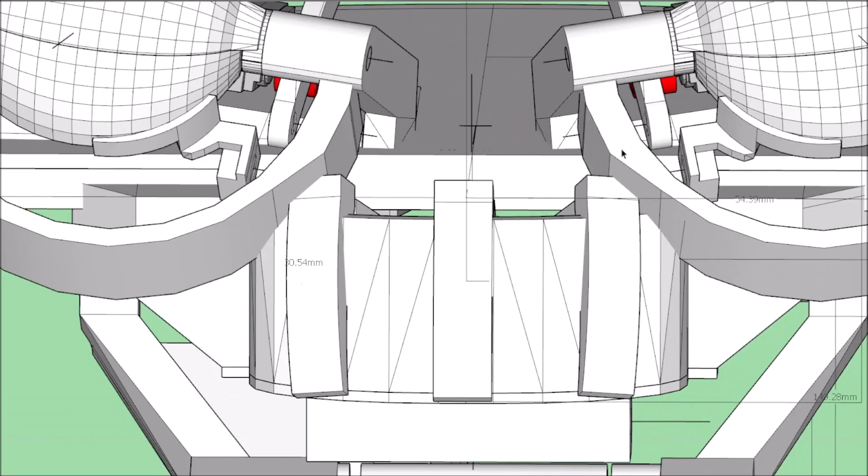But anyway, to the design, this is what I've been studying, mainly to get this connected to this ring underneath the eyes, so I can have this in one piece. And it's not necessarily the outside of this ring, it's the inside where the linkage connects to the servo. I got to make sure it has clearance.

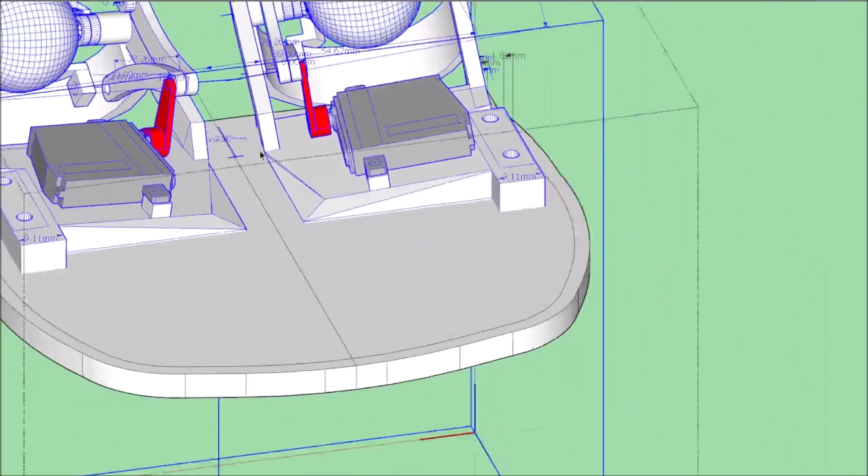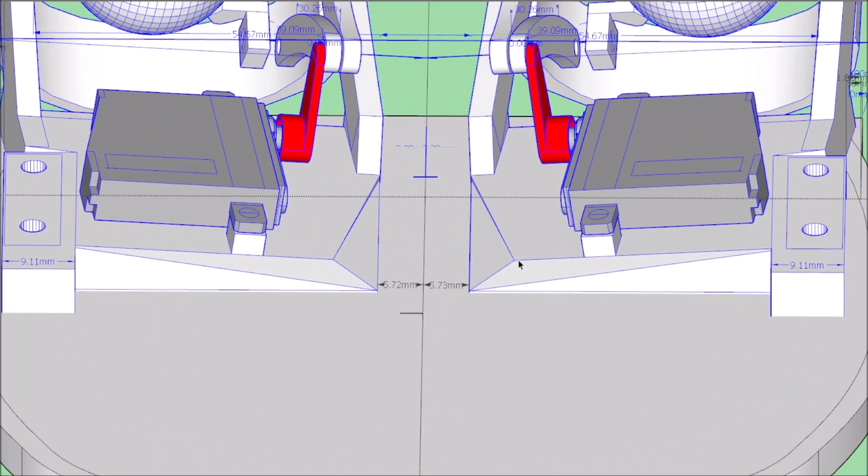But also I'm going to try to join these two together. You'll see me trying to study, because if I can cut this horizontal so I can print it like a flat plate, I like to do that because it helps with the supports. And I try to avoid supports if I can, even if I have to have multiple pieces. That's just the way I like it, because everybody knows that in 3D prints, supports can suck.

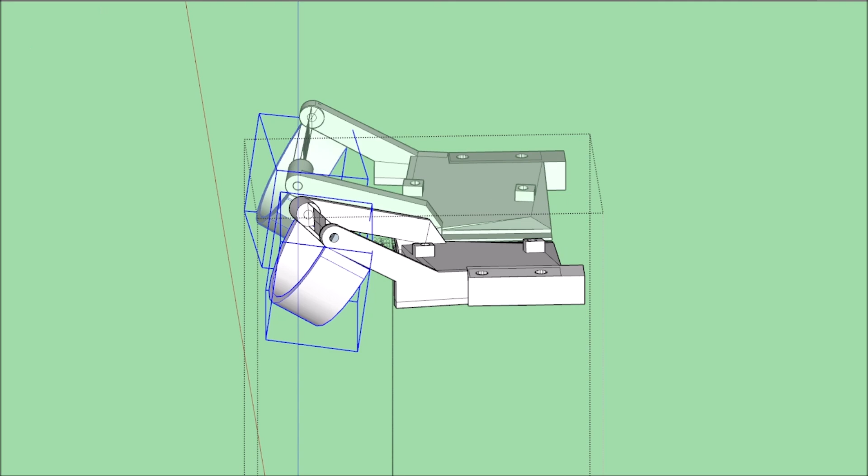Now this is recorded sped up times 4, but you're seeing what I'm trying to edit here, and this is just part of it. You'll find out sometimes the mirror seems to be off, so I'm having to make adjustments. Once again, it's at speed 4, and I'll remove a lot of stuff like the hourglass. My computer is about 12 years old. It's an i5, but it's still powerful and still does the job.

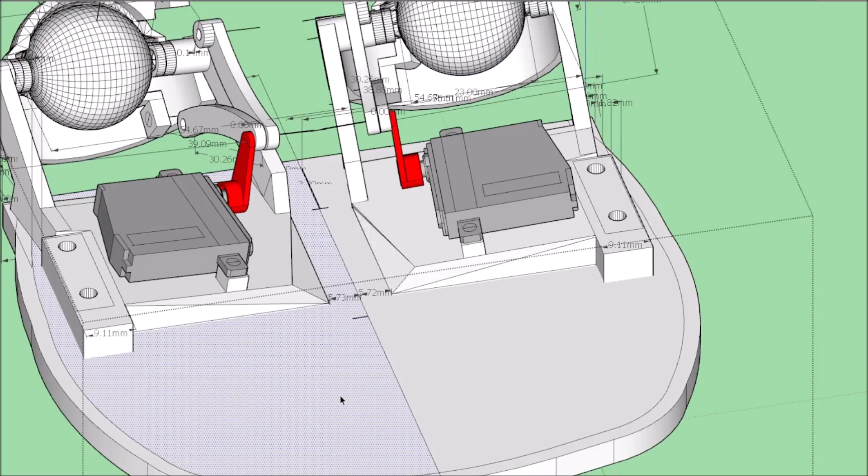So, like I said earlier, the measurement's a little off, and I'm talking like a quarter of a millimeter. You don't think that's much, but it can later on affect things. So what I'll usually do is just mirror again, and it's just me editing.

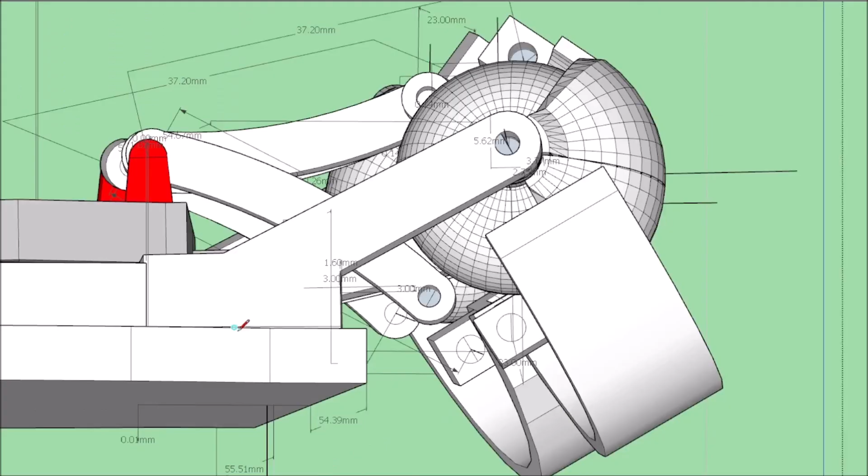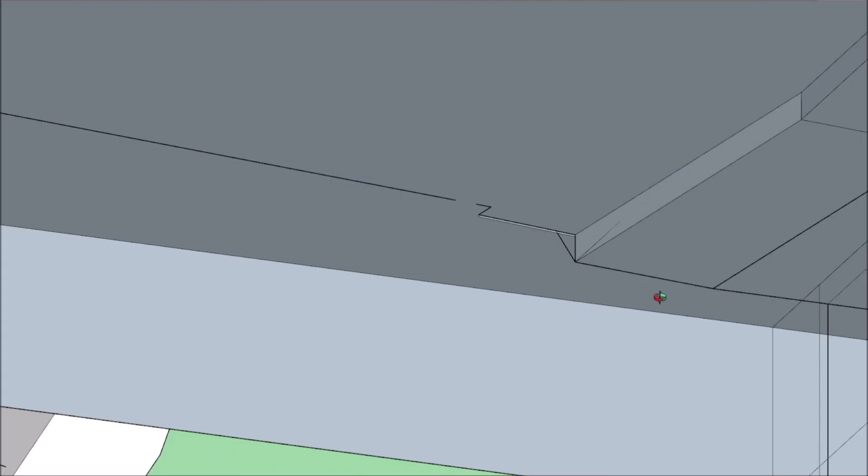What I did is I linked up the interfacing faces and joined these blink mechs to this main support table here. And I'm going in here and editing the inside where all this needs to be removed. For anything you're going to 3D print, you don't want any extra vertices or anything like that.

So I just go in here and edit all this and make sure it's clean, and I check everything in Netfabb to make sure I don't have any problems with the print, because it sucks, but you have to do it. It's just part of it.

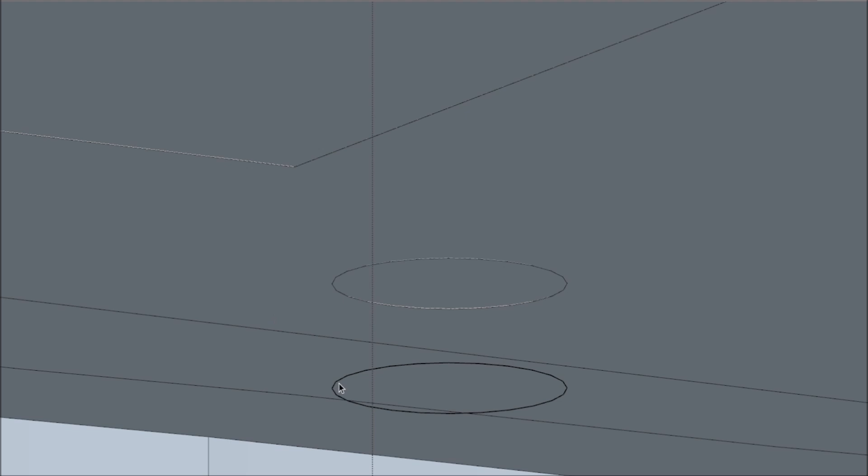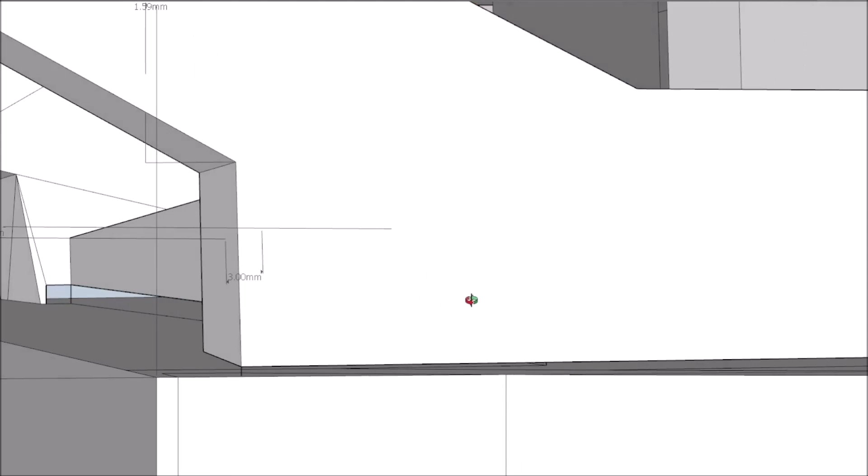But these screw holes here, once everything is set right, I'll just push them through again, extrude them, and make new holes through the whole new plate. It's just a little editing and getting everything set up to get this one side of the mirror complete, so that way I can just mirror it and it'll be all correct again. Here I'm just trying to make sure I get one side correct before I mirror it.

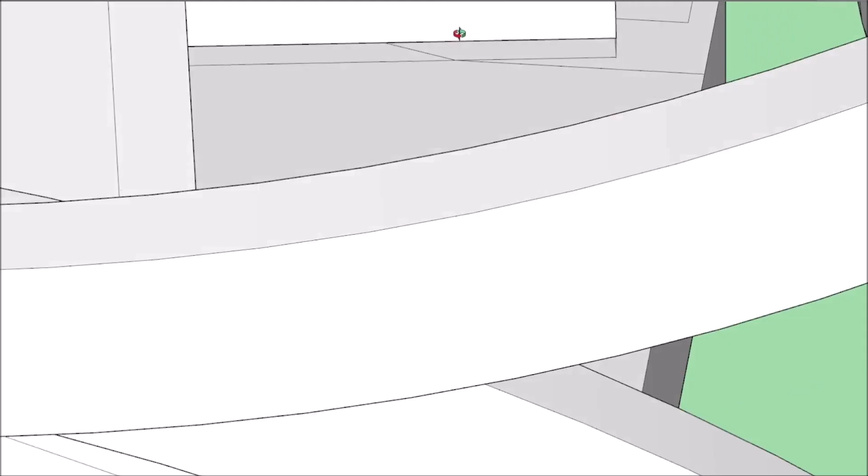I use Netfabb to check, and sometimes it'll find errors, and I can't find the error they say is wrong. There's auto repair and stuff like that, but still, I like to try to fix it myself.

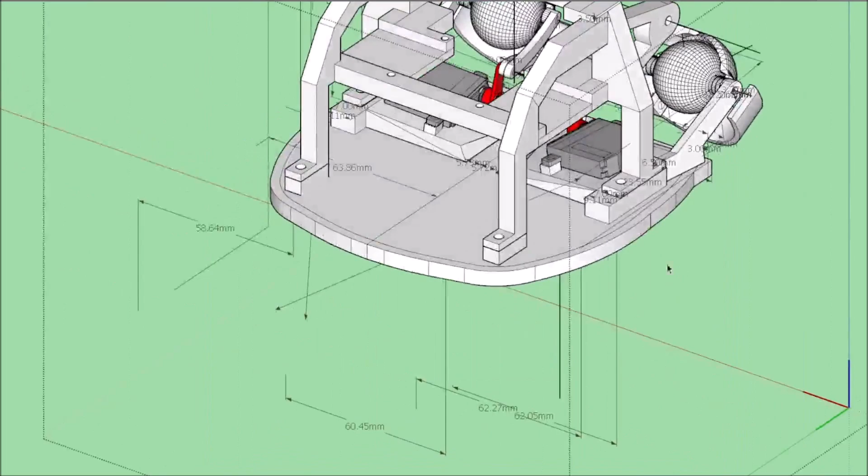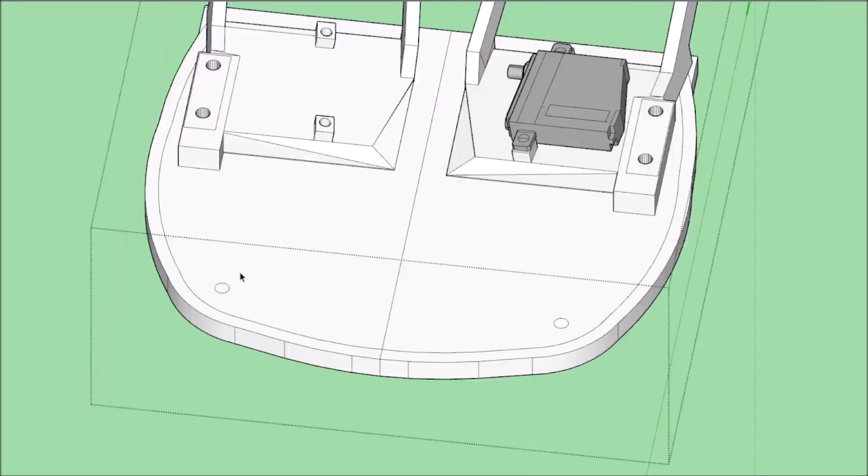But as you see here, I got to make adjustments to this scaffold area so it has a little support that raises up about 5 millimeters. But I also have to make sure that the scaffold is level when it prints. I'm going to print the whole scaffold in one piece.

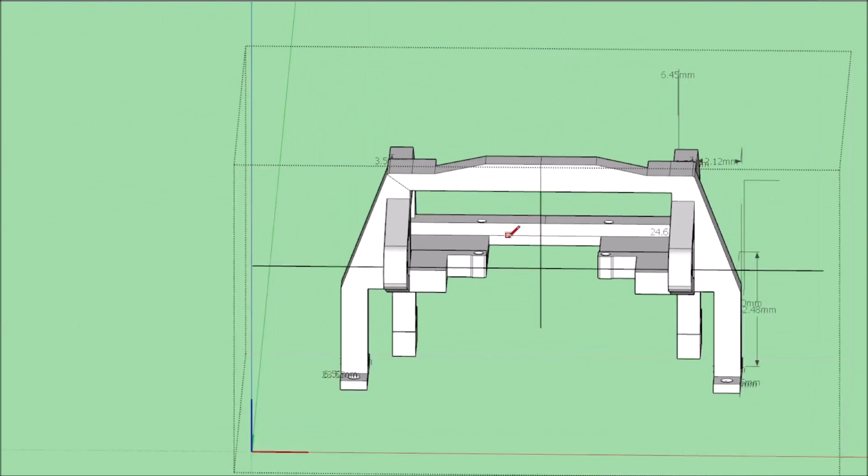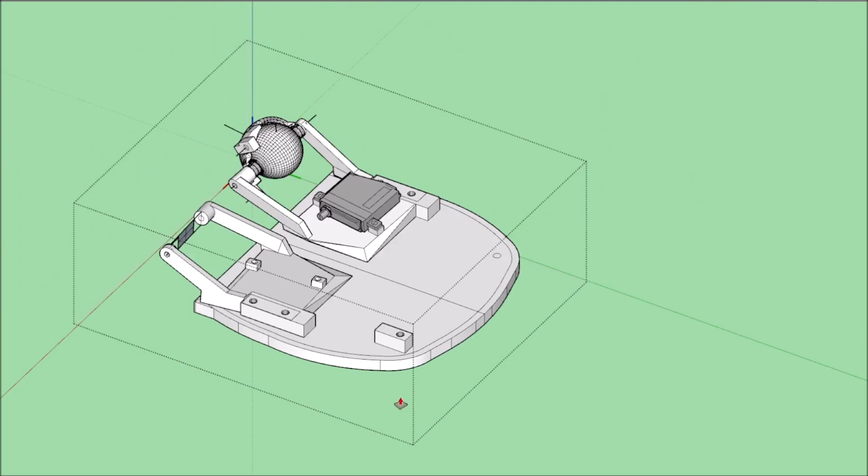Usually I find myself working on the right side, and sometimes I'll switch it up, but you got to be careful, and that's when you'll mess up a mirror. I'm talking about a quarter of a millimeter off, and it'll add up.

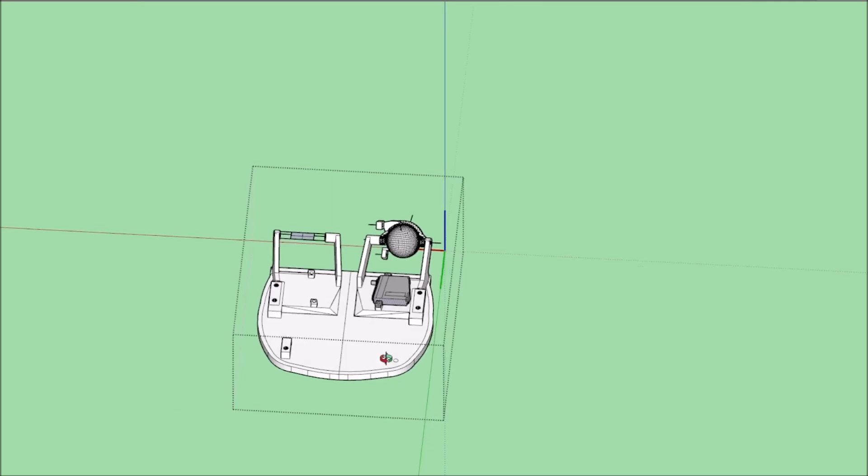You will see here, right here on the component on the left eye, that when I remove the component, it locks it onto the frame of the eyelid neck. So I know I'm going to have to just remove this whole section anyway. So basically I just highlight this whole side and just delete it and just clean up any vertices, lines.

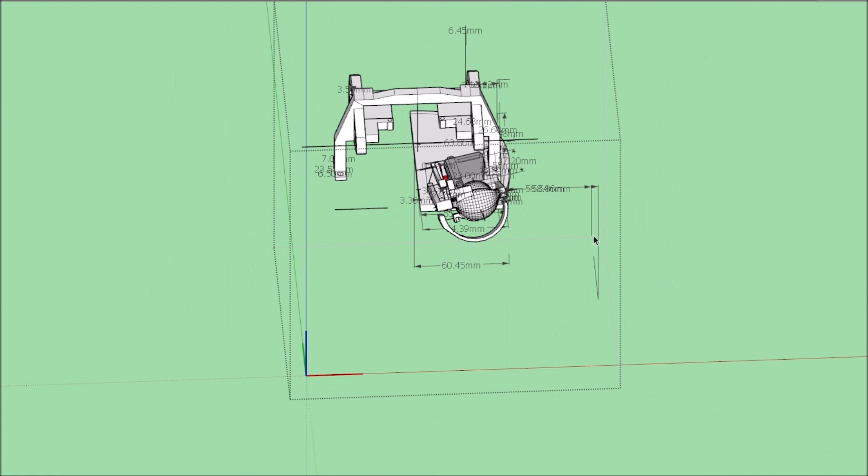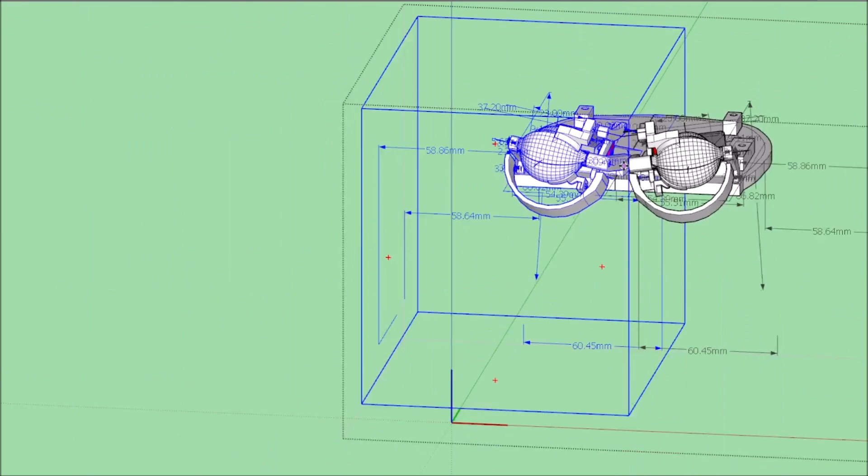Another thing about mirror is that you can go back to it if you want to make another animatronic. You can use this again as, like, from a library. But you can only go so close to where the linkage is hit. But then you have to either change two servos to one servo, that way you can control them with one. But that will kill the mirror design.

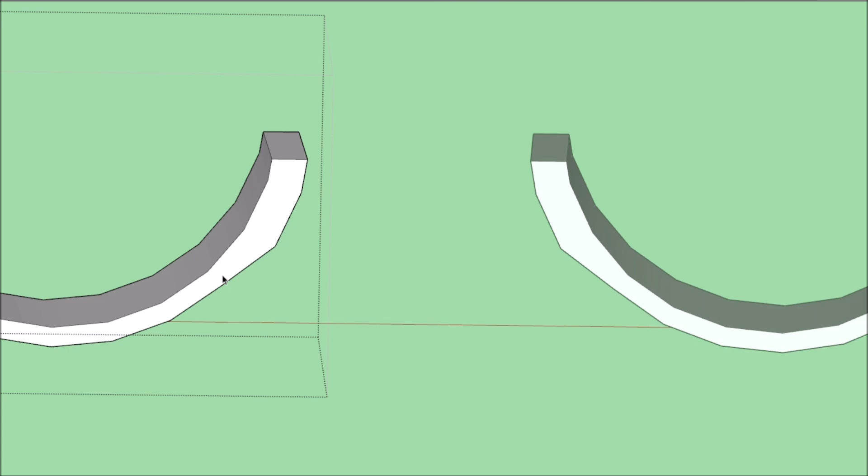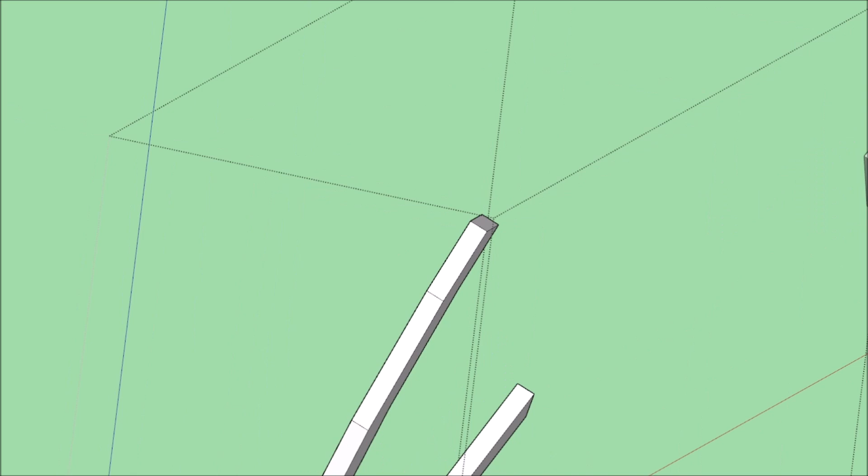But it's fun though. You'll see here where I'm trying to work out this so-called ring under the eye. And I just have to make adjustments to this ring so I can have clearance on the mouth or the lip hinge. I got to make sure I have clearance there, but I also want to join that ring to the bridge of the nose and things like that. All that needs to be filled in because I'm going to have skin attached to it too.

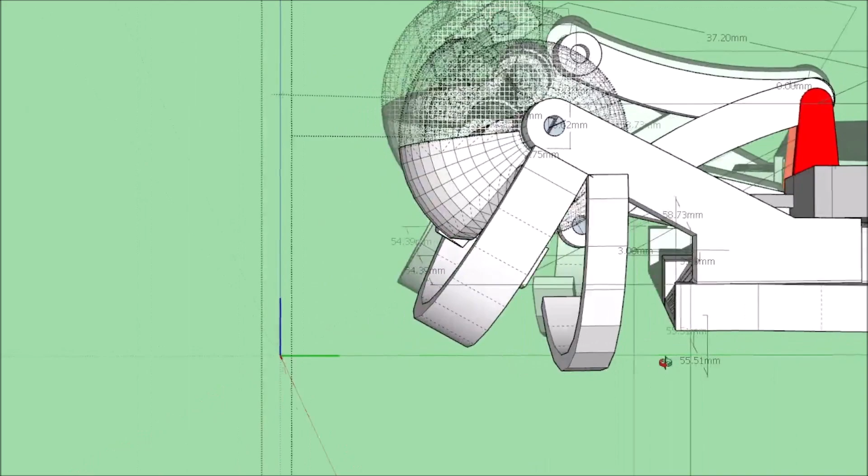I don't want an empty space there because that skin will be baggy, and it could produce a weird kind of movement when I'm moving the lips. But I would prefer to have something to stick the very upper top of the lip there so it would just curl up the upper lip itself.

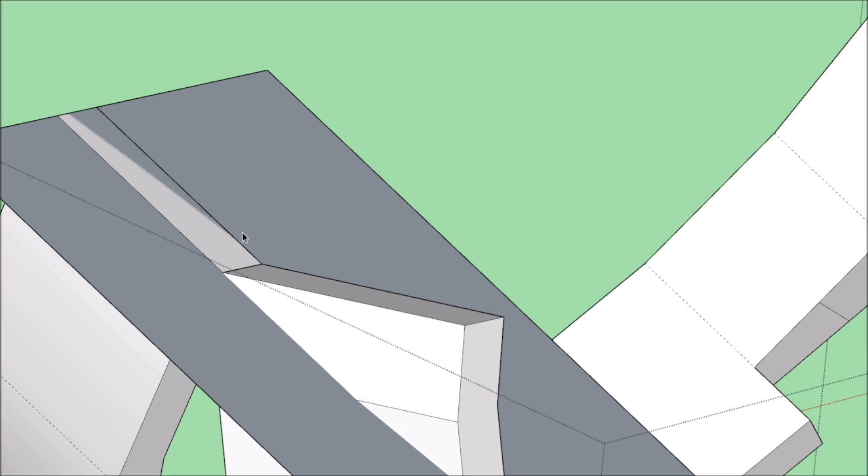But a lot of this design stuff here, I want to be able to make sure that that second part of that ring is the same flatness as that first ring. So I have to make little plates to do that interface with mesh so it'll be flat. But that flat part's going to be connected to that support of the lids.

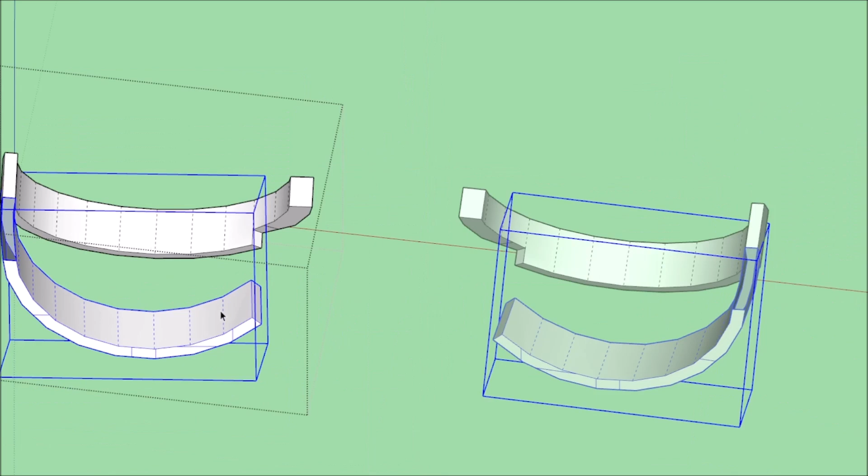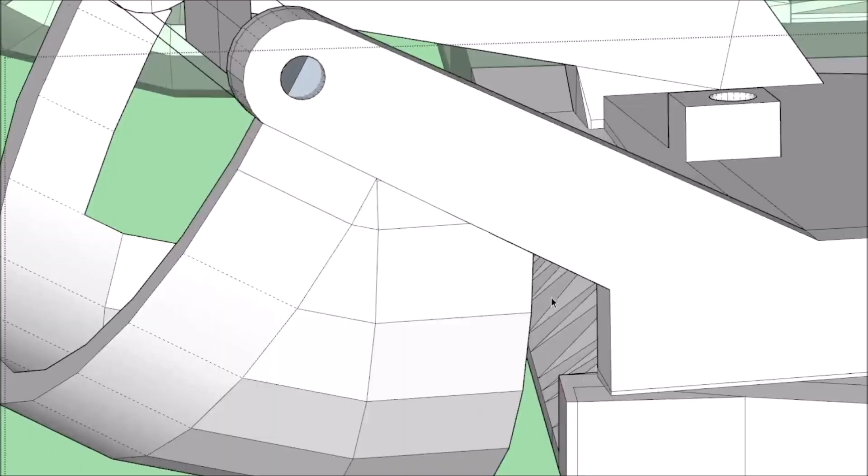And I make mistakes, and also I design things and I say, well, no, this is not going to work. So I'll end up recording all of it, but then I'll just trash it all and start over and do a different process. But this is where I'm wanting it to be critical, the inside layer where that hinge mechanism connects. The linkages have to have clearance, and I can't be bumping on anything in there because it's just going to ruin the whole effect. Then you have to redesign it and print it. It's just foreseeing what I need to do.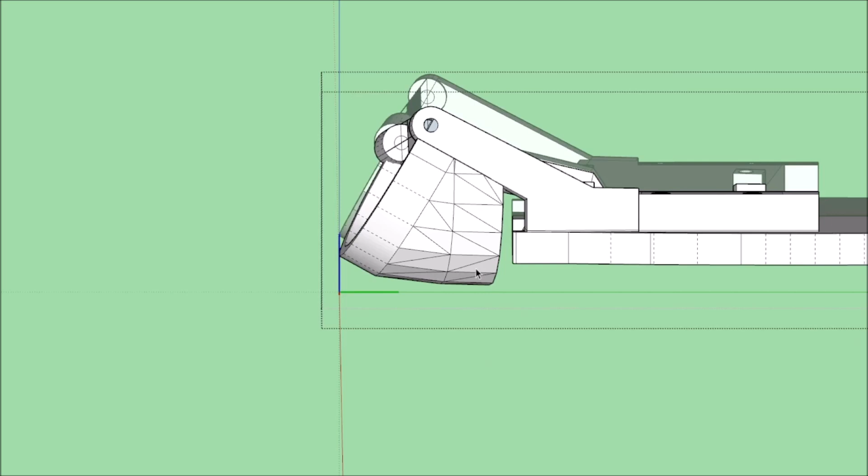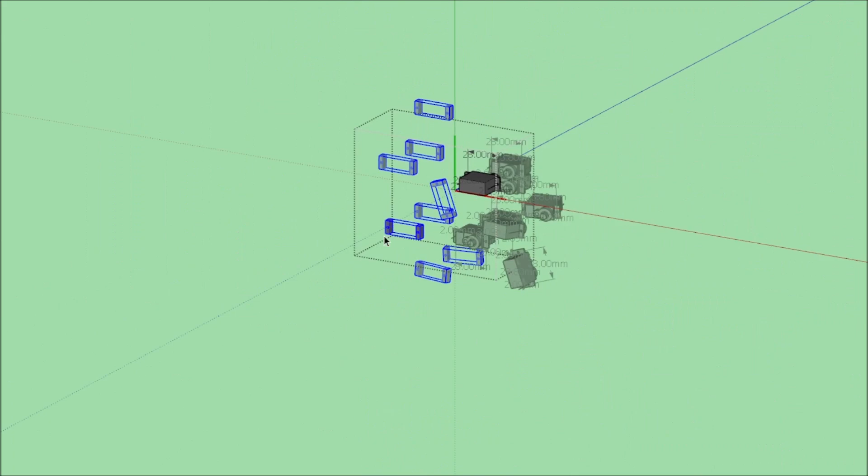But another thing I've been working on too: when you design these things, you have servos, and that's the primary key to the animatronic. To have something move the so-called object, you have to have the servo motor. But if you can't find the servo you need, or a certain type or size or shape, there's thousands of servos to choose from. And like for instance here, I want to make sure that I have another plan, like these servos will work also. So what I do is I search the internet and make sure that I have a plan B.

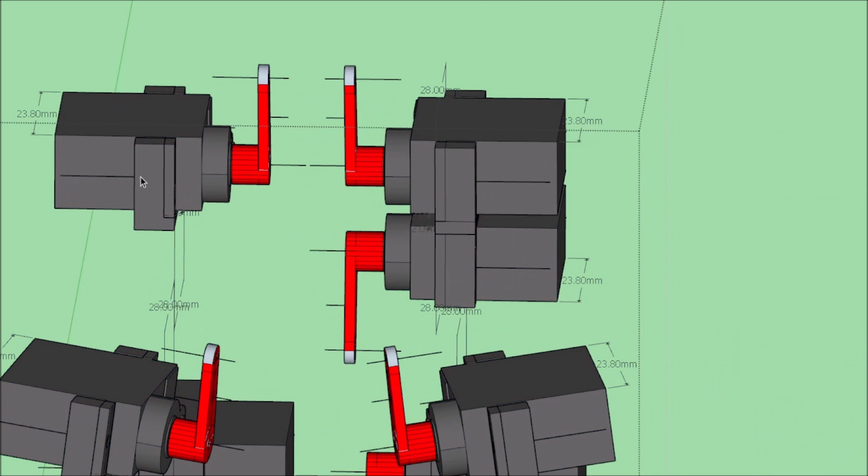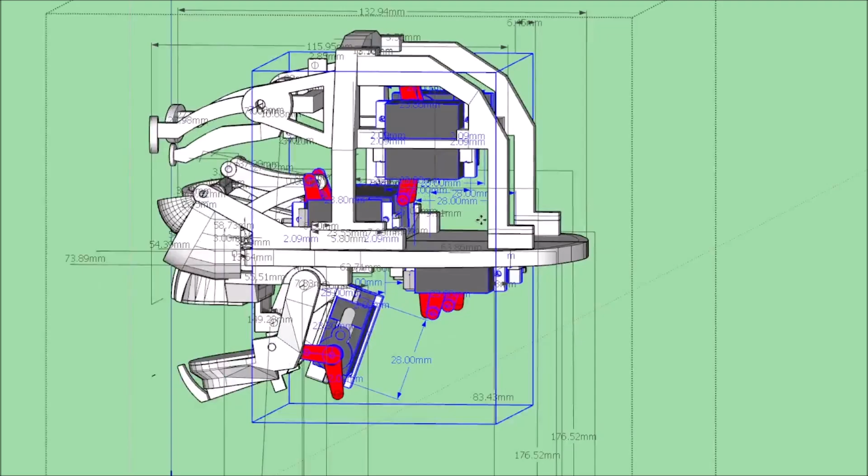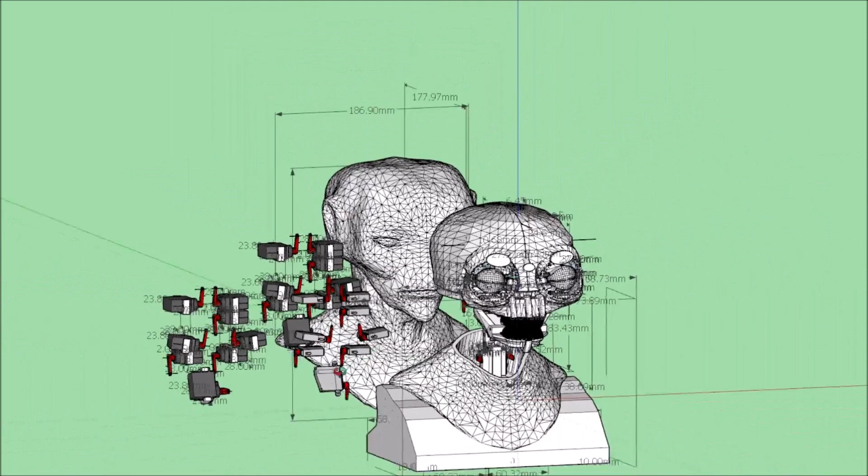And just like right here, I'm making servo sockets for these servos. But I want to keep my servos in this head the same, have 8 of the same size, like 8 wing servos or 8 sub micro servos, because my subscribers eventually will be on Patreon, and I need to make sure that I have plenty of servos available for y'all to order through me or through a link I provide. You can find some available, but they might only have 3 instead of 8. If we have 7,000 subscribers and half of y'all joined Patreon, we got to make sure we have a lot of servos for this animatronic to work. I've been talking to a lot of suppliers to make sure we have this available.

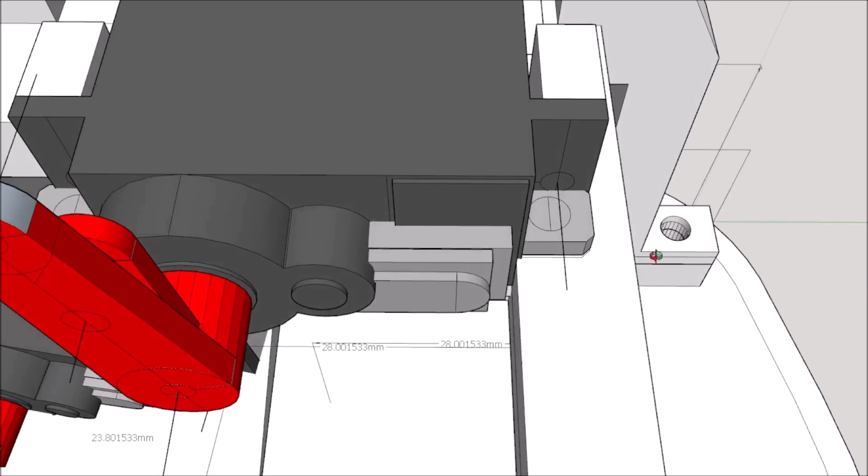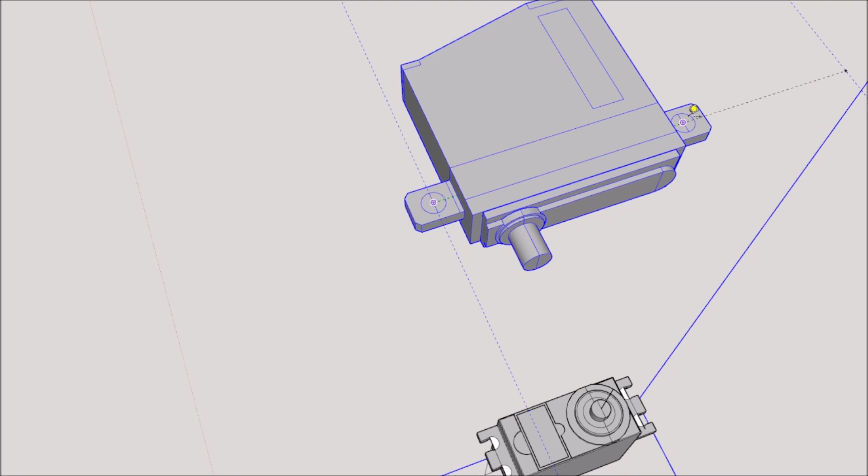But as far as another little trick, if all the servos are the same size, let's go up even bigger. So what I do is I'll take a measurement, once again, of the so-called screw point, which I know is 28 millimeters. So I can take a measurement of a standard servo, which is pretty large, a standard size servo that probably everybody has seen, as you see here. So it's 48 millimeters. I'm going to make this measurement with a tape measure in SketchUp 2017 and tell it to be 48 millimeters. So what does that do? That makes every screw point in the animatronic 48 millimeters, and I've just enlarged the entire animatronic.

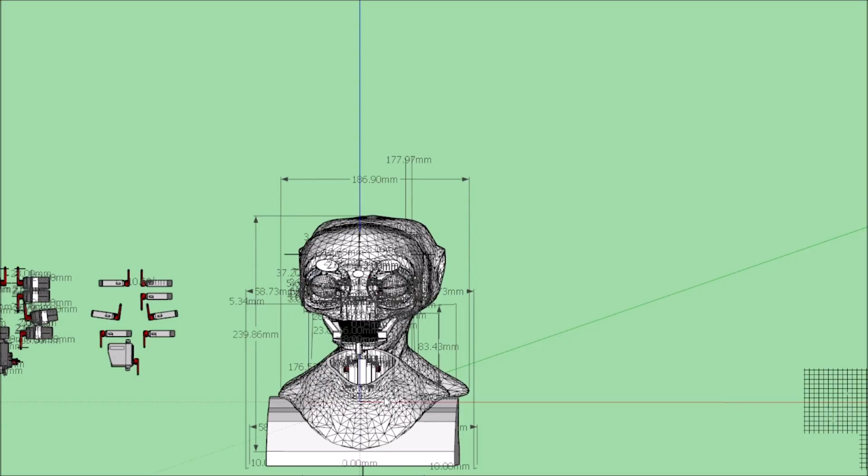So you can see the size comparison. If I had standard servos, all standard servos, this is how much bigger the animatronic would be. And that's just making the adjustment to the servo. Instead of 28, it'd be 48.

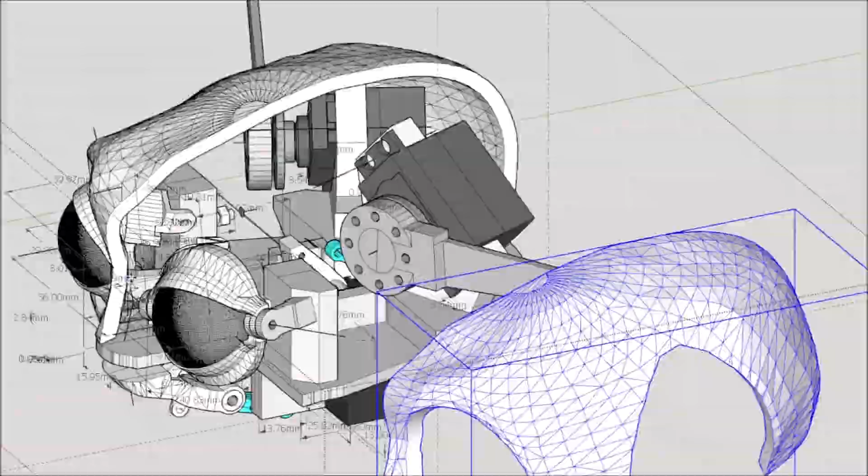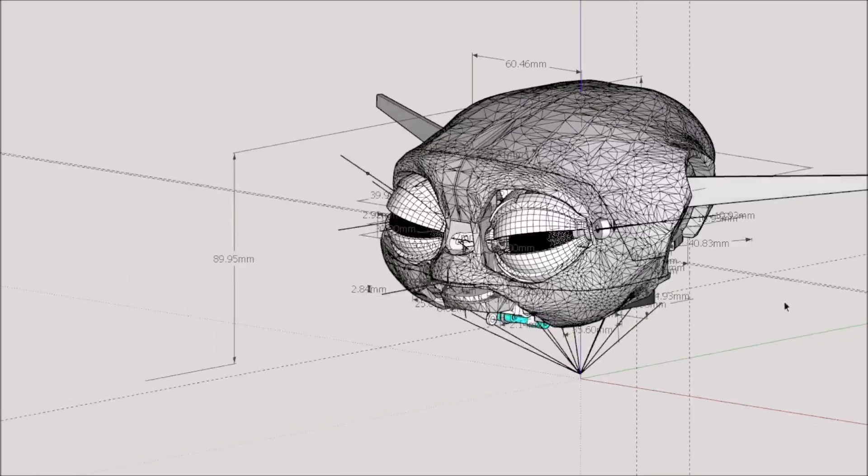Now here's an early design of a Grogu, and I made several of these things. And see, there's a different process with animatronics. With the pop culture thing, everybody says, well, no, it's this size, no, it's that size, no, the eyes are this big, and really nobody knows. They're just guessing. But like I made several versions of this, but mainly there's a different process when you're doing something than what I'm doing. I'm creating a new alien, my design, and I'm doing it this way.

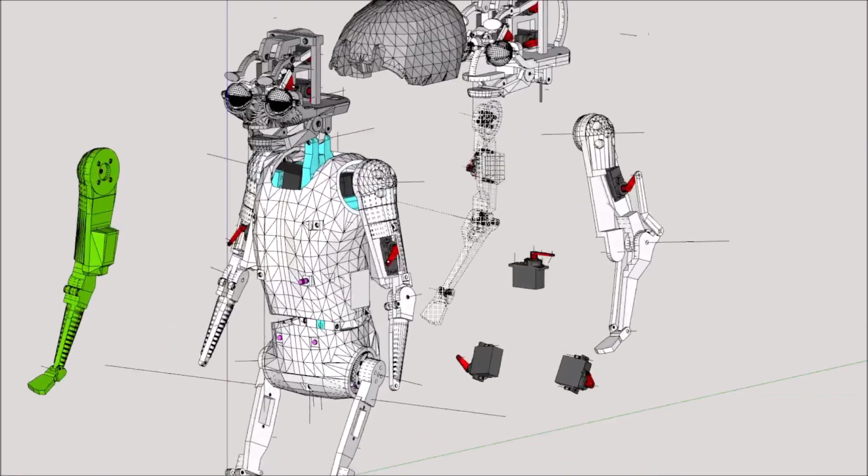But when you have like this baby that I've been designing for a client, a doll maker, and I've been working on this for some time now, everything has to be precise so we can get a skin on this baby. What I had to go through was she sent me a baby that was silicone, and I took measurements of the baby.

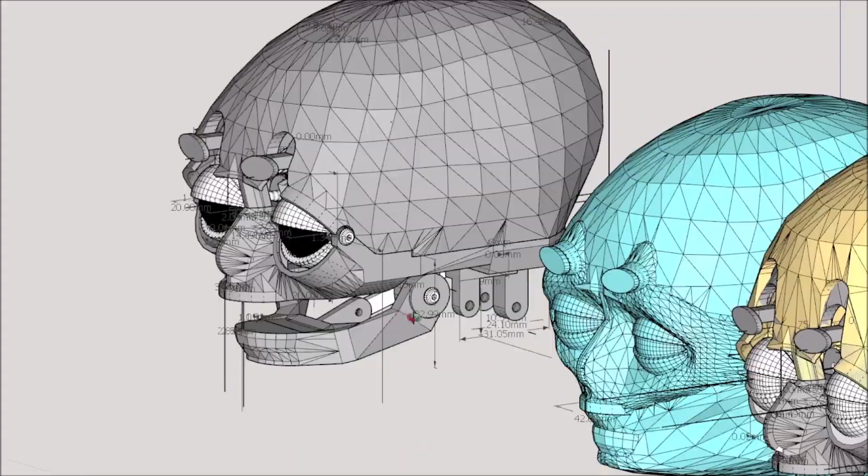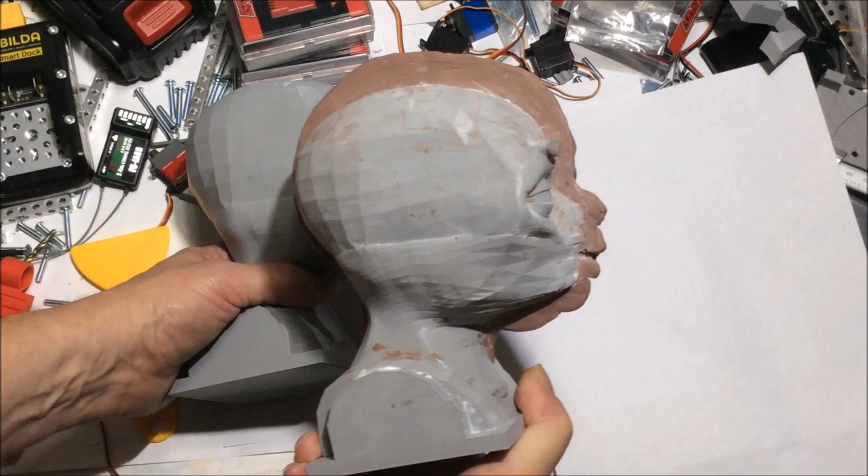I'm using calipers, and I had to make a core, and this core is modeled from the skull, as you see here. And I filled in all the spaces, where the eyelids go and the mouth and stuff like that. So I sent that core to her, and she did a sculpture on it. And I'll show you that now. As you see here, she sculpted the entire head on here, and I removed half of it so I could get a profile picture on how thick it is.

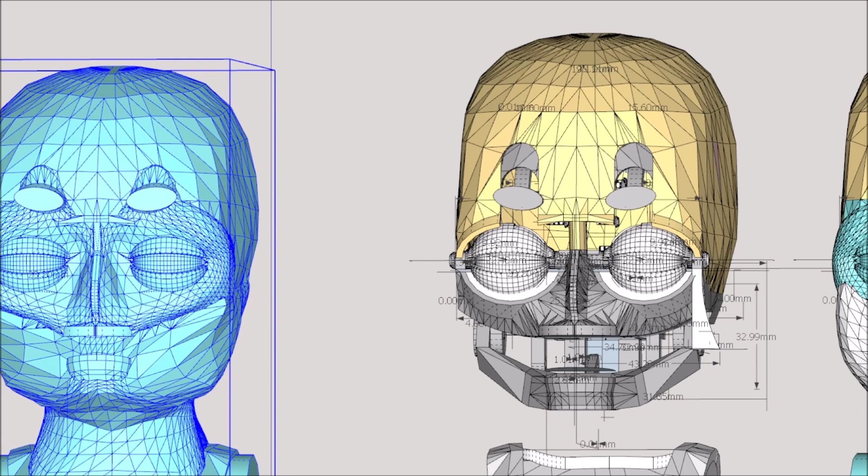Now, my measurements were off, but I'm measuring from a different baby size. And I measured the eyes with calipers and took all the measurements. The wideness is correct, but around the mouth, the mouth is puffy, so I redesigned a new core to go by. And then I'll wait for her to resculpt that, and that way I can go and adjust it, and I had to make a new core so then you can sculpt it.

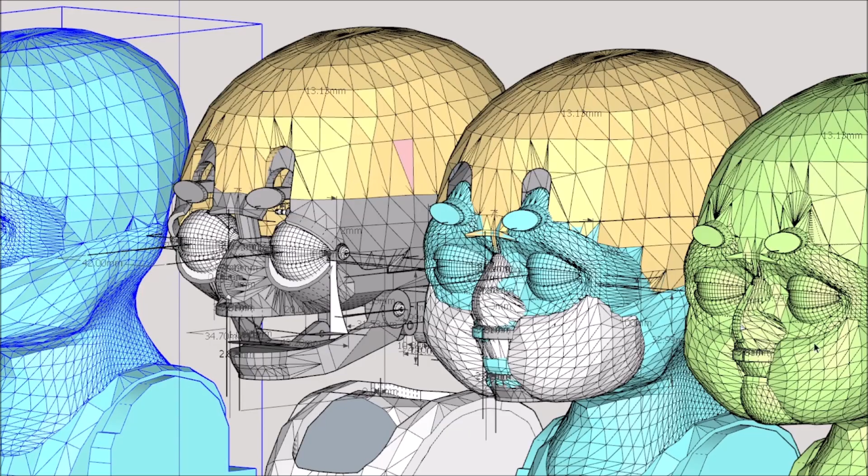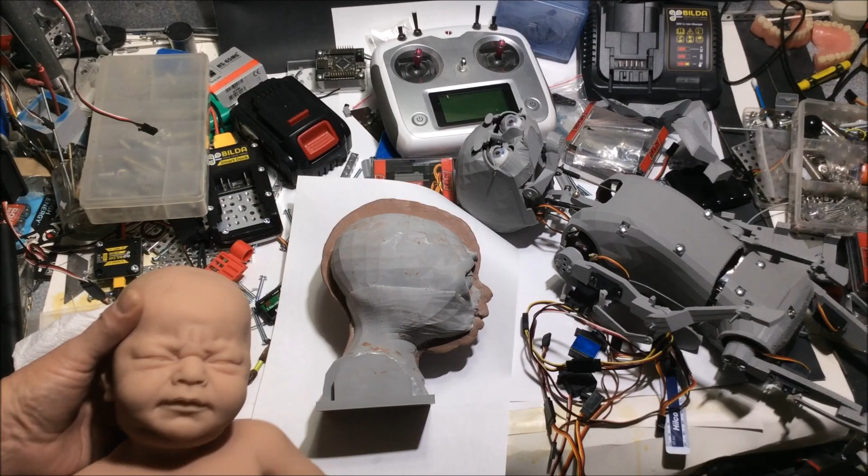But see, this is a different process than what we're doing on the so-called alien creature we're designing now. We're designing it with digital sculpting, and clay sculpting can be done the same way. Like when I make the core of the alien, you could sculpt whatever you want on it, but you just have to be careful on your thicknesses because you don't want your silicone to be thick. And that's the whole key. We're trying to do our best to keep it very thin. And I'm saying maybe under 5 millimeters thickness.

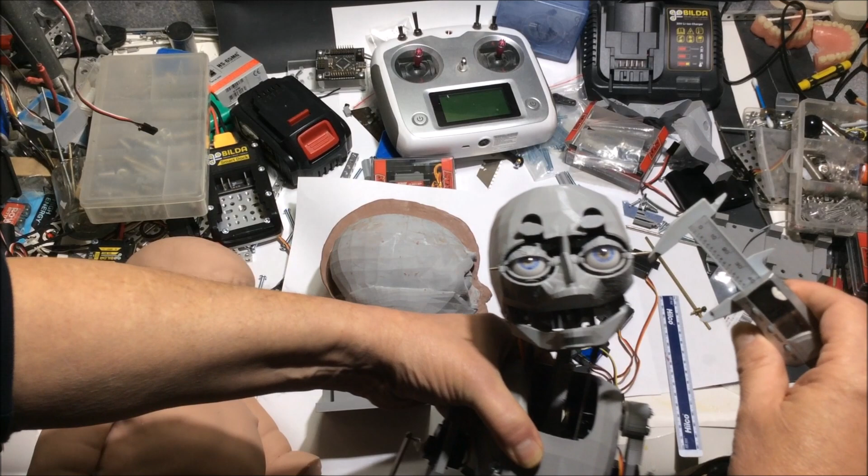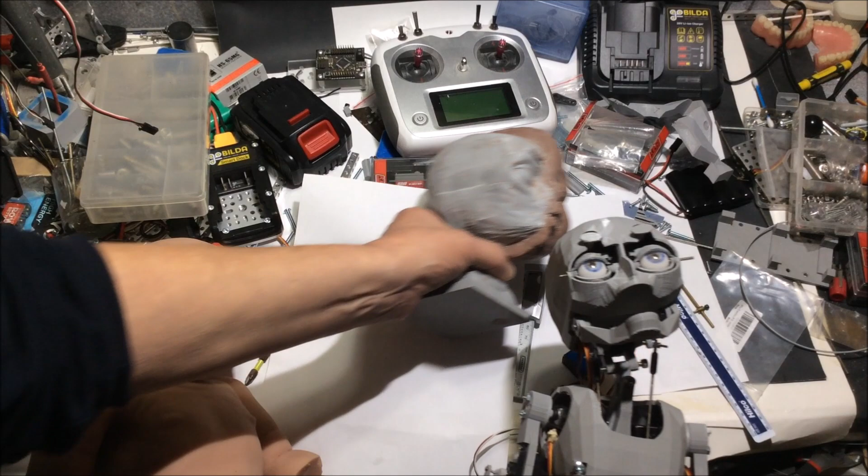Now see, this is the silicone baby, and as you see here, I took the measurements of the eyes, and this was before I've even done anything. And she's a really good sculptor, and she sculpted all these lifelike silicone babies, and she sent me the sculpture as you see here, and I'm making adjustments even where I'm pushing a tool through the clay to get the proper measurements. But this is the original right here, and I'm trying to just match it up to what I have from the baby. But having the eyes have eyelids and things like that makes it kind of not anatomically correct. So a key tool to use would be a 3D scanner.

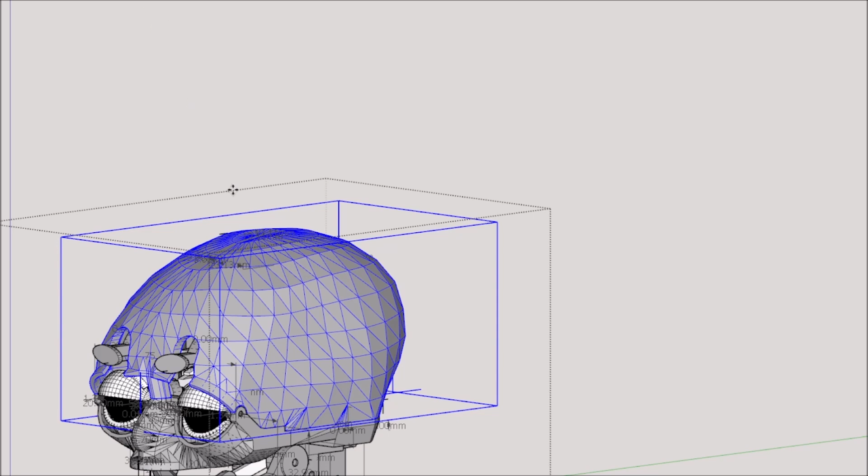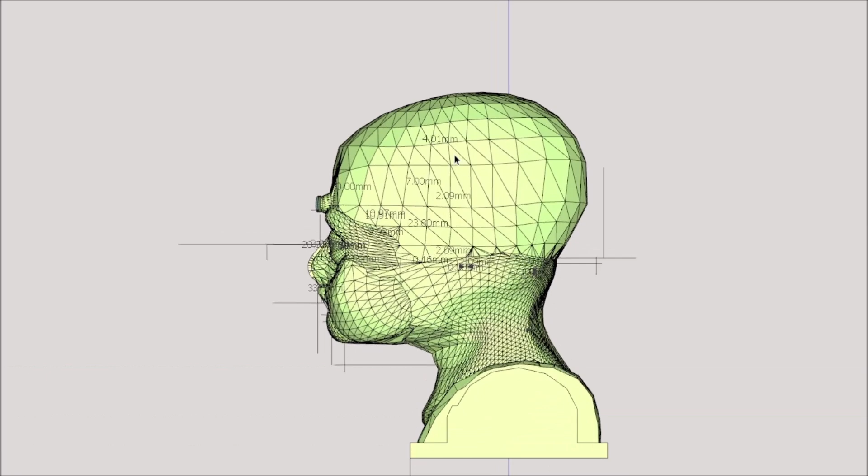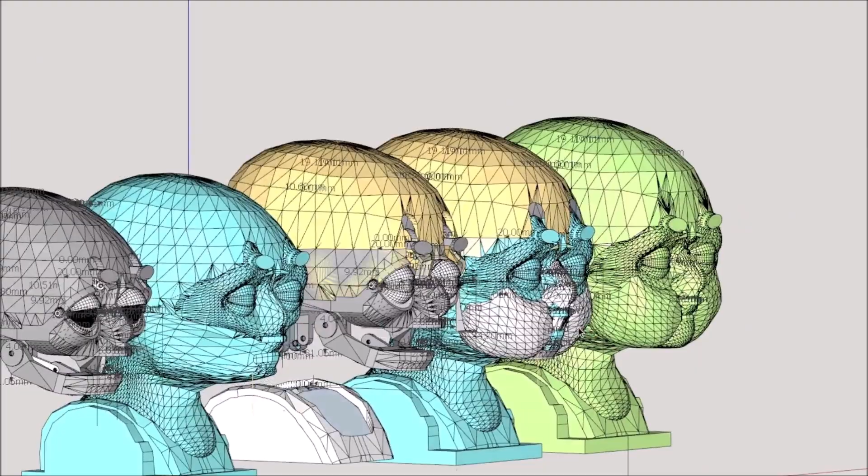But once again, it's a different process. The alien creature is working inside out, and the baby newborn is working outside in, and that can be difficult if you're doing it free-handed or without digital help. But as you see here, here's the new lid for the skull. As far as how much I replace the parts on the core, I'm going to have to replace the parts on the original skull, the animatronic part, and then I can make adjustments to the face also to where the cheeks will just be sliced, so I can have those cheeks move, connected to the face part of the animatronic. But you see here, here's how big the animatronic creature is compared to the baby.